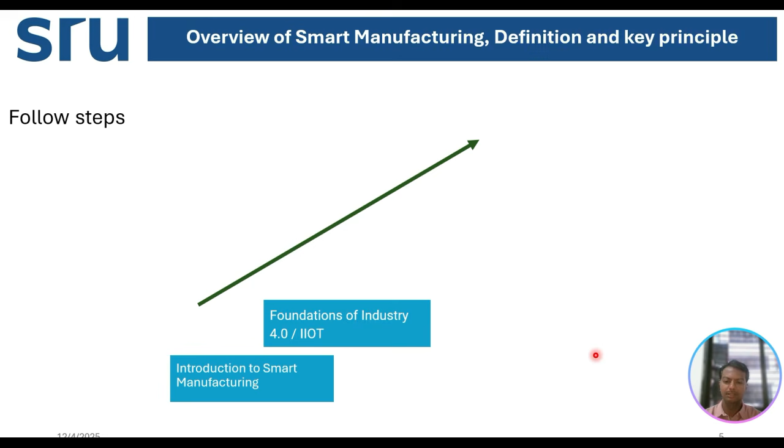Next stage, we will see the foundations of Industry 4.0, IIoT, and digital twin. This digital twin is generally a replica of your manufacturing product or manufacturing system, where you can see the product virtually and also automate this system from your systems, maybe a laptop. With this, you can change the parameters and control them without going to the factory, and we can also monitor through normal mobile gadgets.

When it comes to the hierarchy level, like artificial intelligence, when we adopt AI into manufacturing, most of the time while running the production system we can get data from the sensor. This sensor data we can analyze online or at runtime, and we can take the decision spontaneously, which helps most industries avoid any breakdowns.

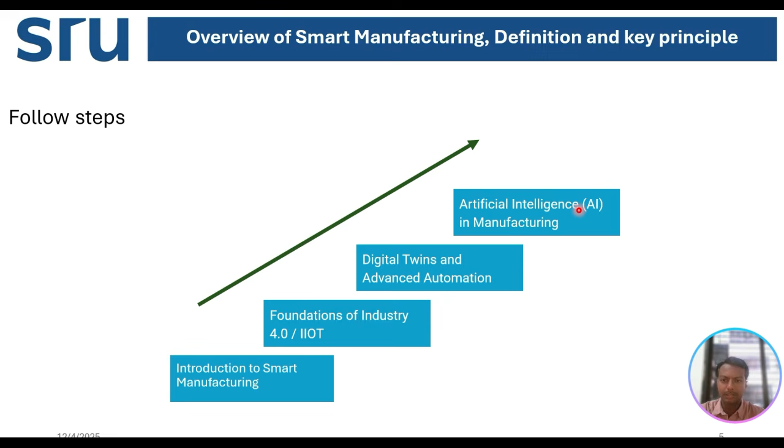When interacting with physical systems over the network, especially through your laptop or desktop while sitting far from the factory, we require the help of internet connection systems involving high speed connectivity. This is a major advantage, but it's also a disadvantage, like cyber attacks. To avoid these cyber attacks, what kind of IP configurations from the factory and what kind of Ethernet configurations, IOP configurations, and all those things come under cyber security in smart manufacturing platforms.

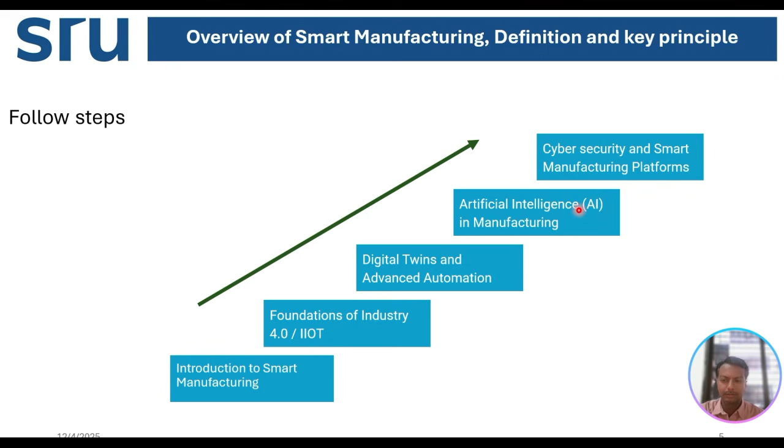When you see the definition, smart manufacturing is the integration of advanced information and manufacturing technologies like AI, IoT, robotics, with integration of the cloud and big data. All these generally create flexible, efficient, and data-driven production systems.

When we talk about data-driven systems, the entire physical system available in the factory can normally be verified and controlled manually. But when we are far away from the physical systems in the factory, we have only one weapon, that is the data. The data generated by sensors is the only parameter we can use to change the system, and physical changes can be done only with the help of this data.

So once we want to change any data, when we give some command, it goes through your cyber network, and it goes to your operation configuration like PLC, then it actuates the systems, and through that the component will move. So like that, we can understand this definition.

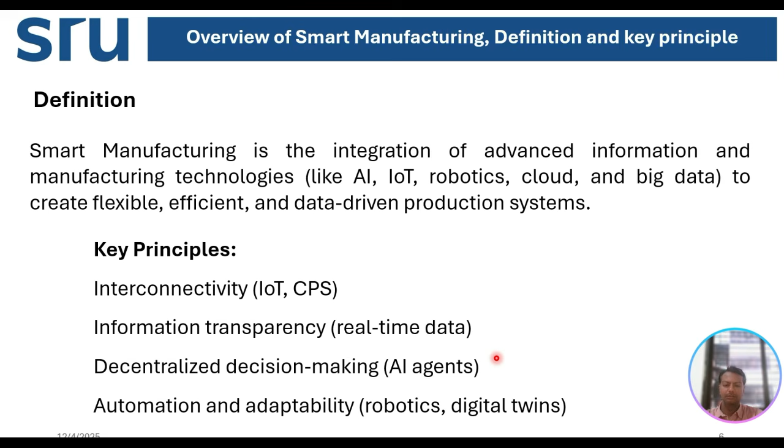So with this, we need to also adopt automation and adaptability with the help of robotics and digital twins. The limitations we have in the current conventional manufacturing - I am not talking here about smart manufacturing, but the conventional manufacturing which we have been following for the last 2 to 3 decades.

Challenges are low adaptability, meaning the fixed production lines can't handle customization easily, high downtime due to manual maintenance scheduling, unexpected failures which generally we face in most industries, and siloed operations due to poor communication between different departments. This is also lagging production and quality control, which is often reactive rather than predictive.

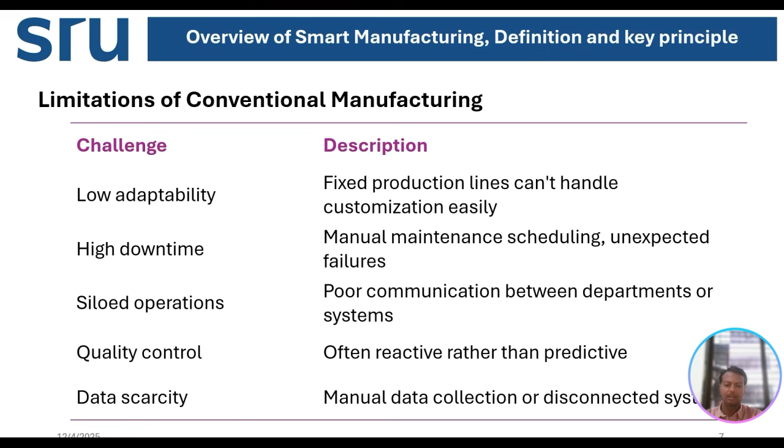So before damaging any product, we need to take immediate action. With that, we can manage the quality of the product. Data scarcity, manual data collection, and disconnected systems - these are the major issues we see in conventional manufacturing.

What do we require now? Real-time need for smart manufacturing. Currently, you can see global supply chain volatility demands dynamic and resilient systems, customer-driven markets, and based upon that, companies should be ready to adopt flexible manufacturing systems for varieties of production or products. Sustainability goals require real-time monitoring of resource consumption.

Workforce shortages push toward automation and AI assistance. As we can see, after AI adoption into the market, one way it's also getting benefited is due to lack of manpower.

So these robots, especially those that come under automation, are helping a lot in the manufacturing sectors, especially in any hazardous environment where humans cannot enter, where physical interaction is required, and due to this scarcity, robots like machines can easily enter and do the operation.

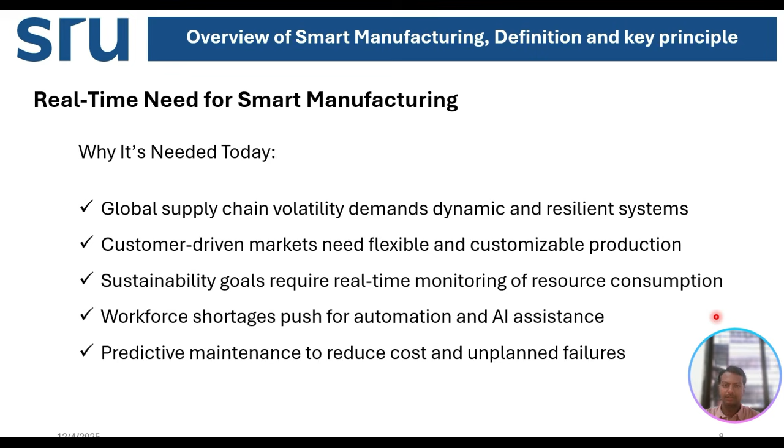So what is the advantage of smart manufacturing? It's flexibility - easy to adapt to product changes, demand fluctuations, and cost efficiency, optimized inventory, energy use, and labor.

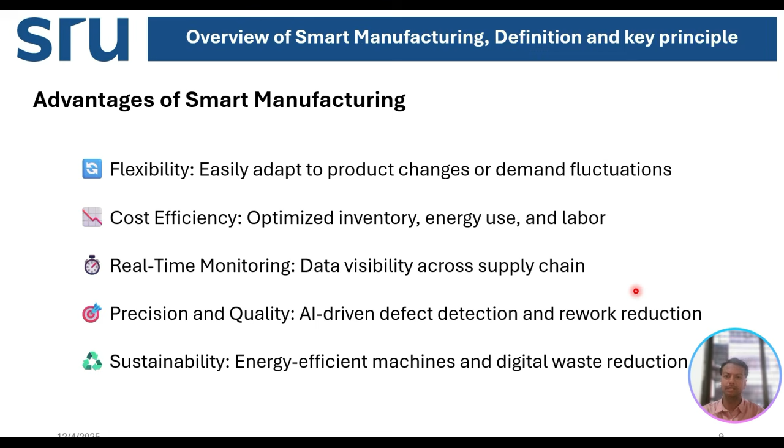Real time monitoring, data visibility across supply chain, and process quality and precision quality - both can be easily achieved with the help of AI driven defect detection systems. So when it comes to sustainability, we can achieve energy efficient machines and digital waste can be reduced by adopting these smart manufacturing technologies.

So transforming from traditional to smart involves many aspects, like investment for adopting new technologies - purchasing and training skilled tech employees. It also involves cost. However, by observing this advantage, it is also possible.

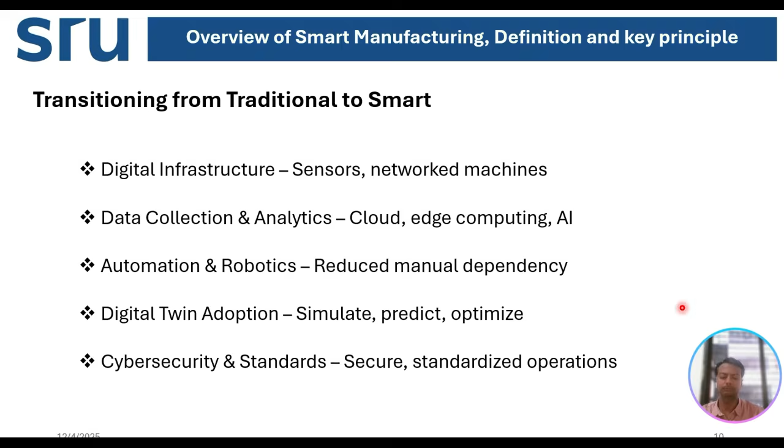So when this roughness is increasing during operations, that will directly be detected in your signals, or any abnormal misalignment in the lathe machine can also be verified through abnormalities in the signals. These signals can easily be understood by doing signal processing techniques and verifying which part the abnormality comes under.

Maybe a misalignment, maybe bowing of the particular shaft, or increasing roughness, or any porosity or blowholes existing on the surface of the machining part. Everything can be easily verified without physical interaction with the machines. So all this can be verified through your dashboards.

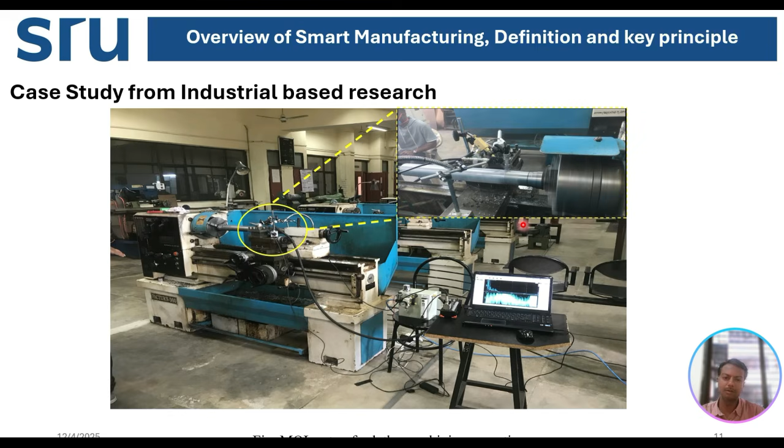So when compared to Industry 3.0 to 4.0, we have adopted complete AI integrated with edge computing IoT devices, and we can easily run the production systems.

The conventional systems, we have seen the limitation of this: lack of adaptability and reliance on manual work. And if any issue like a pandemic situation comes, these conventional systems immediately need to be stopped. This also offered limited quality controls. Like when you want to see images of 1,000 parts, it is very difficult for a single person to verify in a particular time.